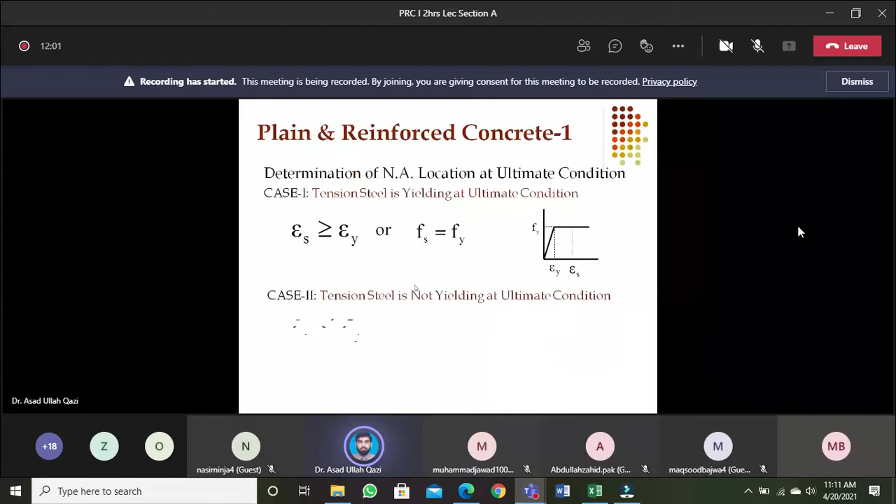Okay, this determination of neutral axis - in case we are discussing the flexural design of beams, analysis and design of beams, location of the neutral axis at ultimate condition is important to be fixed, because without this we cannot solve the analysis or design problem.

So location of neutral axis at ultimate condition. Ultimate condition means that concrete strain, when concrete strain will approach ultimate strain in the top fiber, and ultimate strain, we mentioned that as per ACI code this value is 0.003.

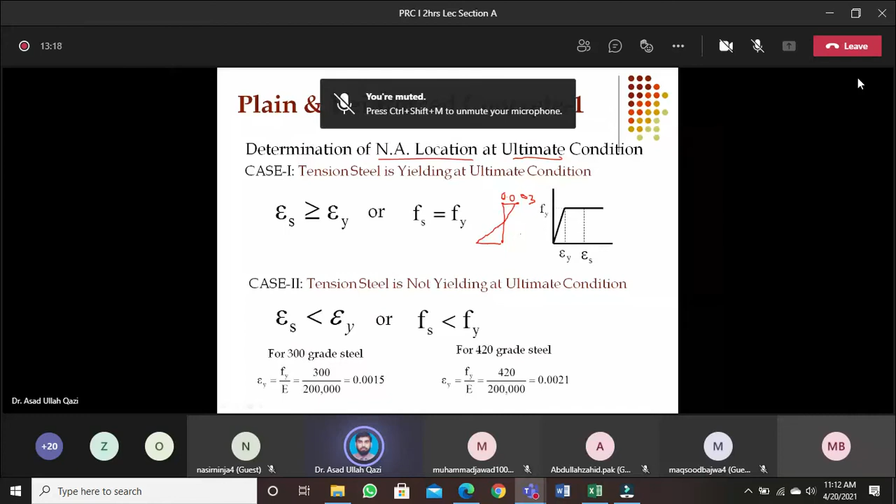So corresponding to this, what is the steel strain, and the steel location with reference to the top edge of the beam, which is the maximum strained or stressed compression fiber - its distance is marked as D, effective depth. And at this instant, when concrete approaches its ultimate strain, where is the neutral axis and its depth C, is important. And the distance from neutral axis to the steel will be then D minus C.

So this is the ultimate strain diagram corresponding to failure of concrete, because we declare the crushing strain of concrete will be 0.003, and this is the limit, and further strain in concrete we can't afford - this will be the last stage in terms of section ultimate strength.

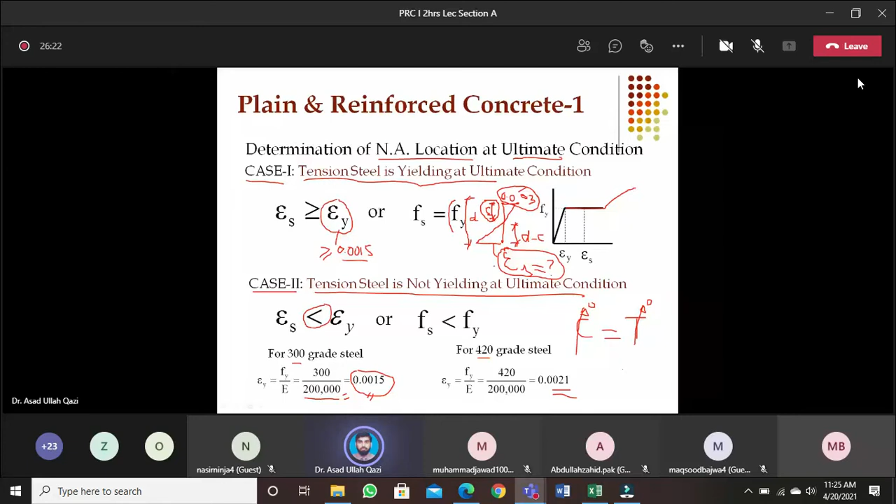Now we want to discuss case 1, its equilibrium equation, and how to get the neutral axis depth. Because as I said earlier, in the strain diagram, we know the strain diagram is linear and we know the limiting strain of concrete, that is 0.003, which ACI recommended as the ultimate strain, conservatively selected.

But at this stage, what is the neutral axis depth? And corresponding to that, what is the steel strain? These are two important questions which are to be answered.

So in order to derive the equation of equilibrium for case 1, we know the simple equilibrium equation for longitudinal equilibrium on a cross section: T must be equal to C.

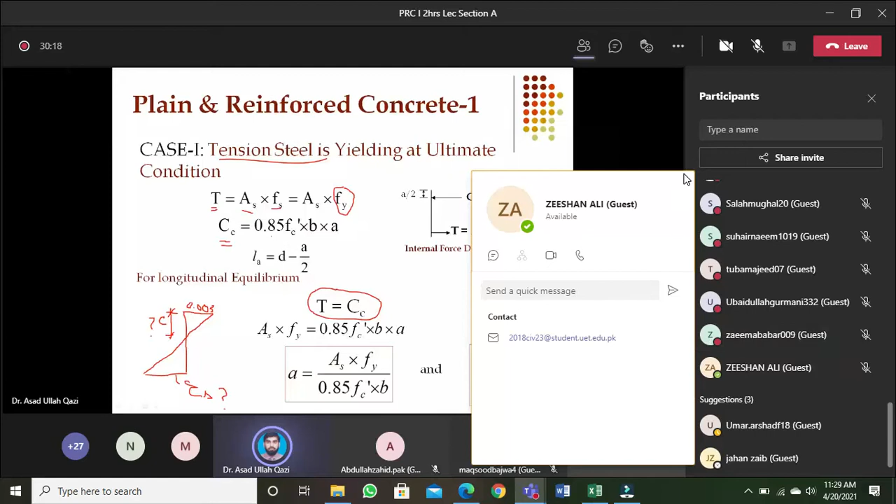As per USD, the maximum stress in steel in our equilibrium equations will be Fy. And in terms of concrete, CC: since last lecture we discussed Whitney's uniform stress block, 0.85 f'c if multiplied with the area over which these uniform stresses are present, will give us the concrete force Cc, which balances the equilibrium with the steel.

The force Cc will act at a depth a/2 from top, and the location of T is known to us because from top it will be at a distance d, the effective depth. So the distance between these two forces can be calculated very easily, and that will be d minus a/2, the internal lever arm.

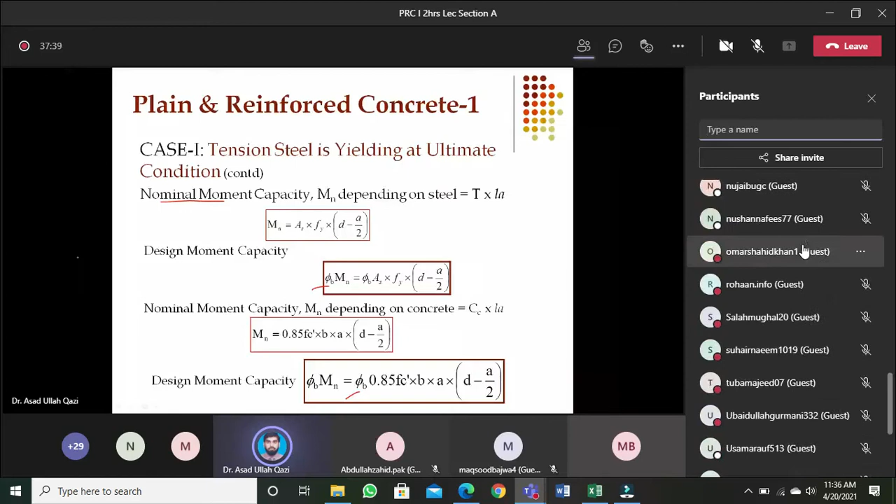In case of flexure, this phi value will be 0.9 if and only if epsilon s is greater than or at least equal to 0.005. We will discuss this strain threshold in detail—you may be surprised that I'm not using strain equal to epsilon y here. I'm giving a higher magnitude of strain in order to utilize phi equal to 0.9.

So on the strain diagram of steel, it means if I'm having grade 300 steel and 0.0015 is the yield strain of steel. So if my epsilon s is equal to epsilon y, I will not be allowed to use phi 0.9. I will be allowed to use phi 0.65.

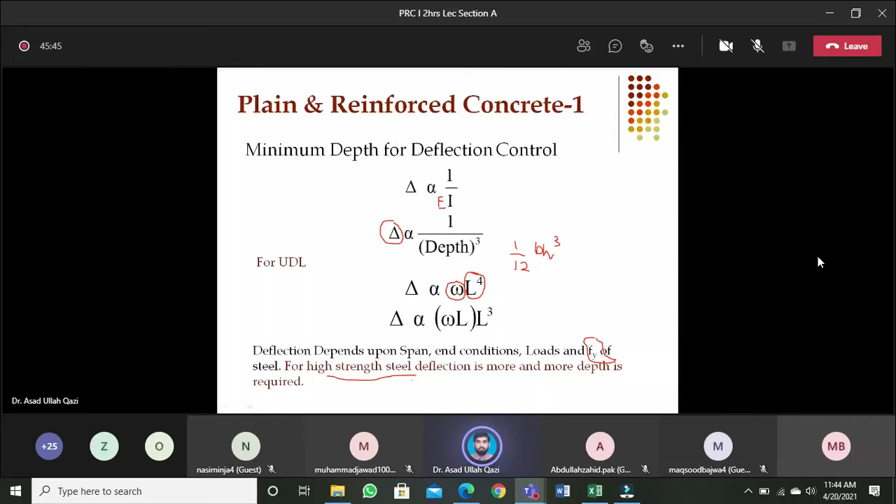So I can refer to table 9.3.1.1 of ACI 318-2019, where for different steel grades 300, 420, 520, and based on different end conditions, simply supported, one end continuous, both end continuous, cantilever, H is proposed

to control the deflections. So to fulfill the serviceability requirements, deflection within limits and less crack widths are the serviceability checks. So to keep deflection within limits, ACI will suggest you to select H for a simply supported beam based on L by 20, span by 20. But if one end is continuous, then this 20 can be increased to 23. If both ends continuous, then the denominator will increase to 26.

And in this way, for cantilevers, you will find that the demand is quite big because the tip of the cantilever will sag and deflection will be more. So more H is required if you compare different end conditions.

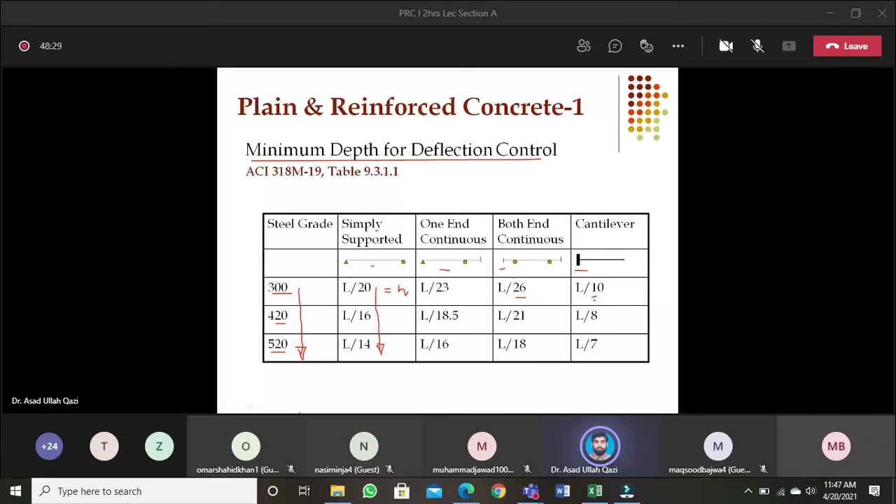So all this information we are going to utilize when I will design the beam cross section.

But at the moment, I am more interested in performing a capacity analysis because what we have talked about, case 1 and case 2, I just want to apply it on a beam problem which I have assigned to section B, and I was expecting that your section will also work on the same problem, but sadly you are not interested in watching the video or doing the assigned work.

Now let me first propose one statement that there is a beam with known cross section. I am proposing that B is 300 millimeter, a 1 foot wide beam, and its gross depth is 450 millimeter. So it means 18-inch deep beam, 1 foot by 18 inch.

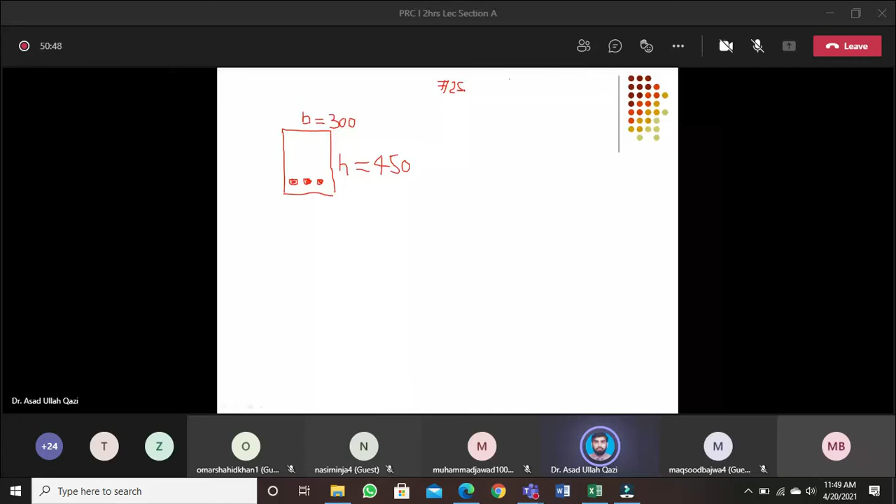So in US customary, there are different designations. We will share with you some design aids and tables. In different textbooks, you can find these design aids at the end of books. In ACI code, you can get the different bars and their designations along with the nominal dia and areas and weight per unit length. Number 25 has the nominal dia 25 millimeter dia, and it is deformed bar, and nominal area 510 millimeter square.

It will not be exactly pi by 4 db square because this bar has some deformations, lugs on the surface, so this nominal area will be calculated, and it is 510 millimeter square, the nominal area of these deformed bars, cross-sectional area. Such three bars are present in the cross-section.

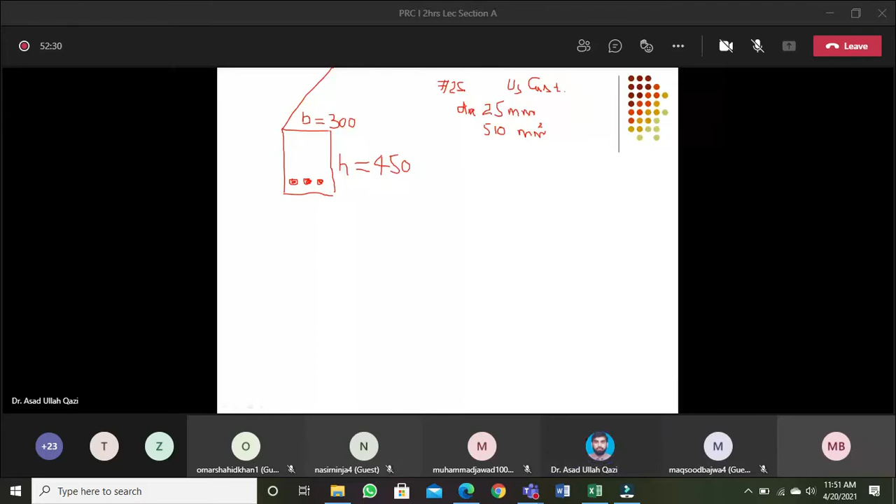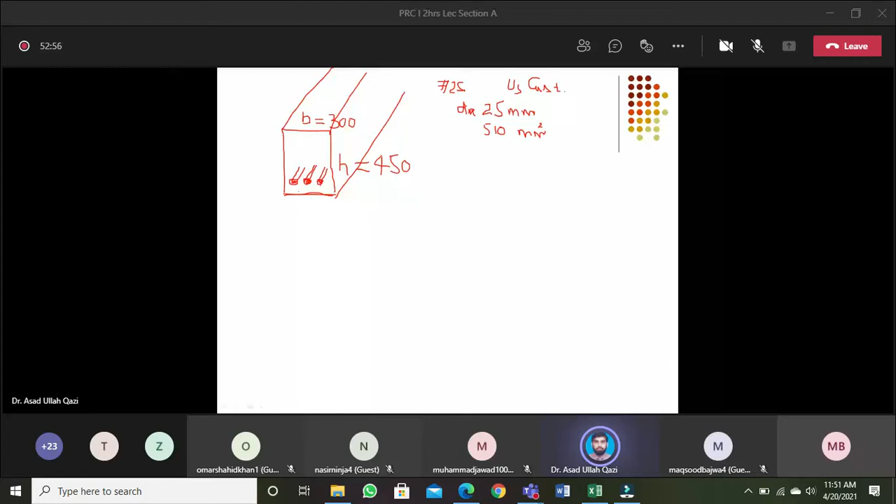And in this beam, these steel bars which are present at the bottom, these are present at a distance from bottom 75 millimeter, and 75 millimeter is the distance from center of the bar to the beam soffit. So this is I am giving you. We will discuss why this 75, why not 50 or any other dimension.

So this will be our topic in next lectures: covers and recommended ACI covers for different structural elements. So at the moment I am proposing that from base bottom to the center of the layer, cover is 75 millimeter. Cover to the center from base.

So it means effective depth of this beam will be the distance from top compression face to the center, will then be 450 minus 75. It will come out to be 375 millimeters.

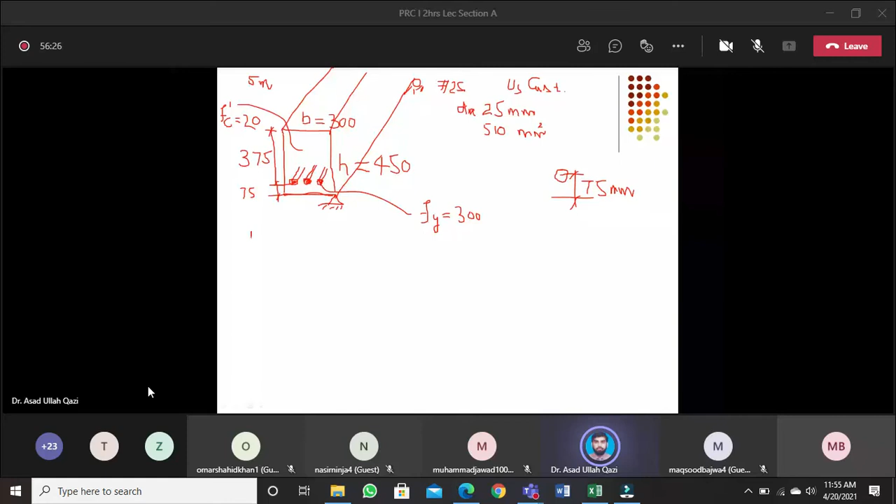And you are asked to determine the capacity of this beam. It means the question is how much this beam can provide us moment resistance. This is the question, and we call it capacity analysis because in this question cross-sectional details, material strengths, span, end conditions, dimensions are known to us except its capacity.

This is called capacity analysis. You are given with the drawing. You know each and every detail regarding the reinforcements, spans. You are asked to give us how much ultimate moment this beam can resist.

This is my question. And what I have discussed on the slide, case 1 and case 2 beam, that will be applied here. And we got capacity equations that Mu will be equal to phi into T into lever arm, or we can say that C into lever arm can give us internal moment resistance.

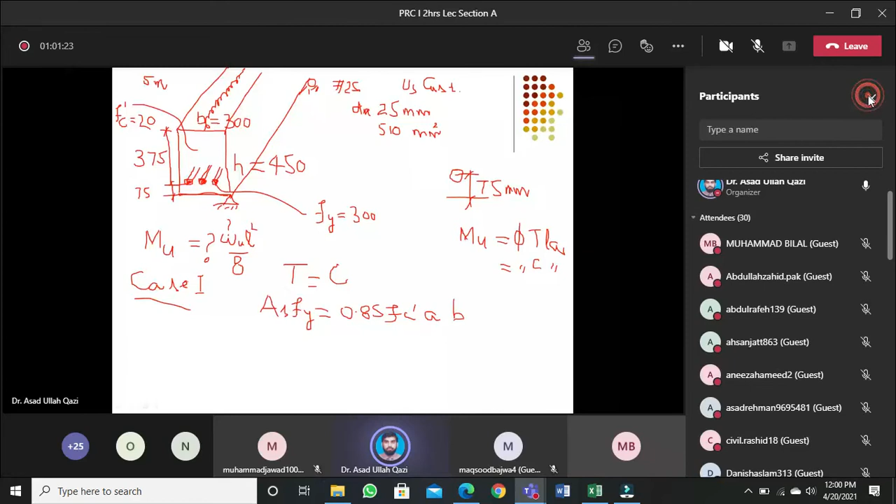And that is actually the question: how much ultimate uniformly distributed load I can apply on this beam, and against that what will be the ultimate moment resistance this beam will offer.

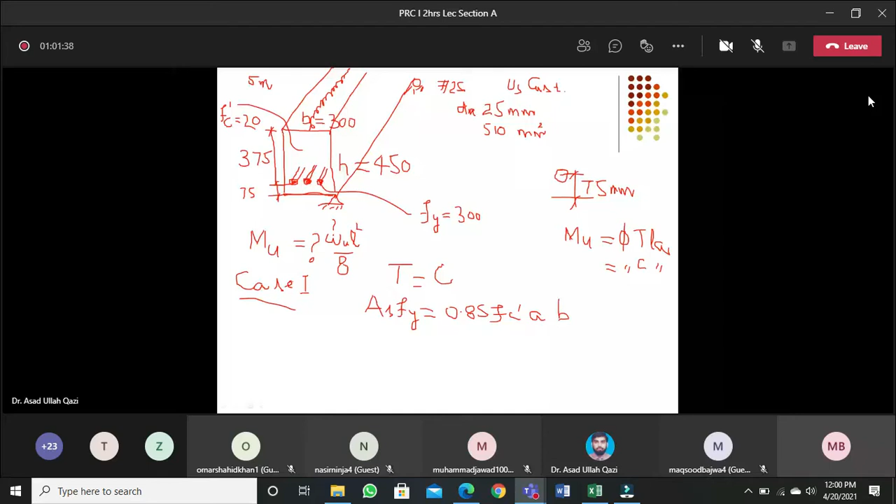And considering that it is a case 1 beam, so as I said, your first assumption will be it is a case 1 beam. So considering that this beam is simply supported and the mid-span section will be maximum stressed, at mid-span section I write the longitudinal equilibrium equation T equal to C, and keeping in mind this case 1, I am putting Fs as Fy.

And B is given, Fc prime is known, area of steel is known. All I want to know is uniform stress block depth. I will keep A on one side and arrange it like As Fy divided by 0.85 Fc prime into B.

Now since I have 3 bars, so 3 into 510, because 1 bar has the area 510, into the steel grade given was 300, divided by 0.85 Fc prime 20. I'm keeping megapascal in numerator and 20 megapascal in denominator, and B as 300.

Don't forget this picture. Actually you got this A equal to 90. And now from C you can get the actual neutral axis depth, because this A is the uniform stress block - this is the simplified approach by Whitney. And C will be A over beta 1, because we proved that the relationship between the actual neutral axis and uniform stress block depth is A equal to beta 1 C.

Since concrete grade is 20, beta 1 will be 0.85. So how much will C be? 90 divided by 0.85. Sir, it's 105.9. 105.9 millimeter.

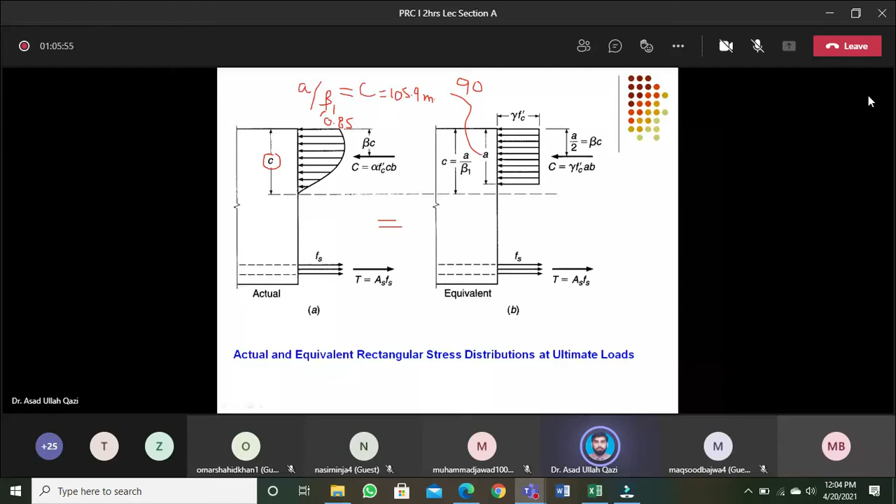Agreed? Now, if this C is 105.9, and this ultimate strain, as ACI has fixed this crushing strain as 0.003,

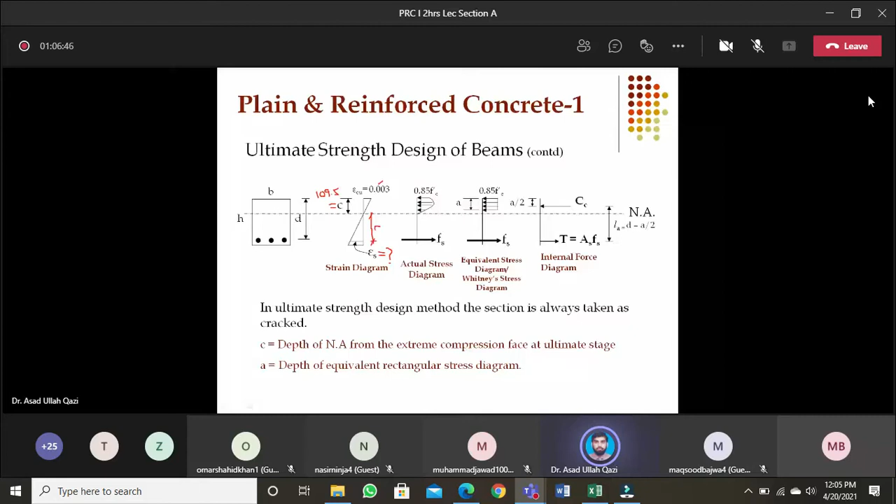what is epsilon s corresponding to this neutral axis depth C is an important check, because I have mentioned in my equilibrium equation T equal to C, and T I considered as AS into Fy. So over there I assumed that steel will be at yield, and based on this assumption I got A, from A I got C. And now drawing the strain diagram and confirming that at this neutral axis depth, whether the epsilon s as assumed is equal to or greater than epsilon y. If the answer is yes, I will be happy because my assumption is okay and it is a case 1 beam.

If not, then I have to handle it like a case 2 beam. My assumption was that once steel yields, and corresponding to that I get a neutral axis, then at that neutral axis I check based on my strain diagram whether my assumption that steel yields at this neutral axis is valid or invalid. If the assumption is invalid, it means I was wrong in expecting that at this neutral axis depth steel will yield. So I need to go back and revise my equation with AS into FS, and then I have to handle it like a case 2 beam. Let's see what we get.

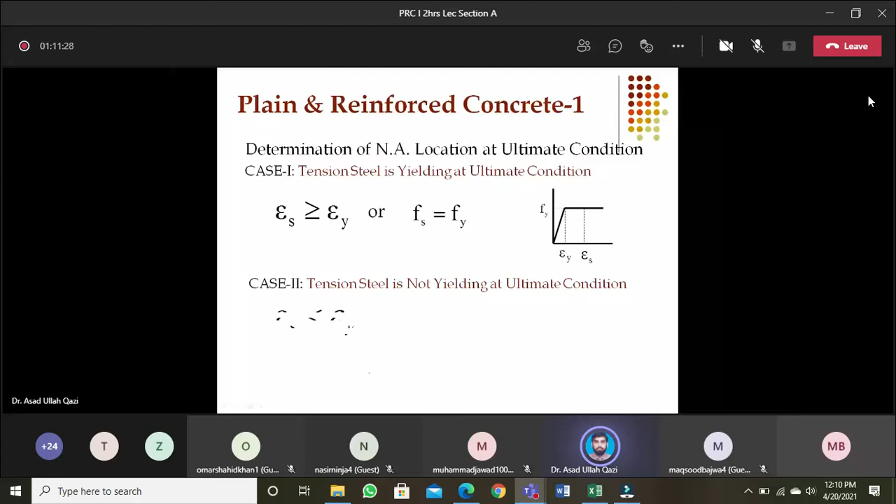We selected 3 bars of 25mm, grade was 300, divided by 0.85 into 20 grade of concrete into B, and A was 90, and from A you got C, and C was 105.9. Agreed? And from this now you got

epsilon S, and from the simple strain diagram you mentioned that 0.003 divided by 105.9 into 375 minus 105.9 - check this - so you also got 0.0076. How much again? 0.0076, good. So that is the epsilon S.

So as assumed, epsilon S is well above epsilon Y. So in terms of the steel stress strain relationship, definitely it is on the yield plateau, and it is even above 0.005, which is a very desirable strain limit.

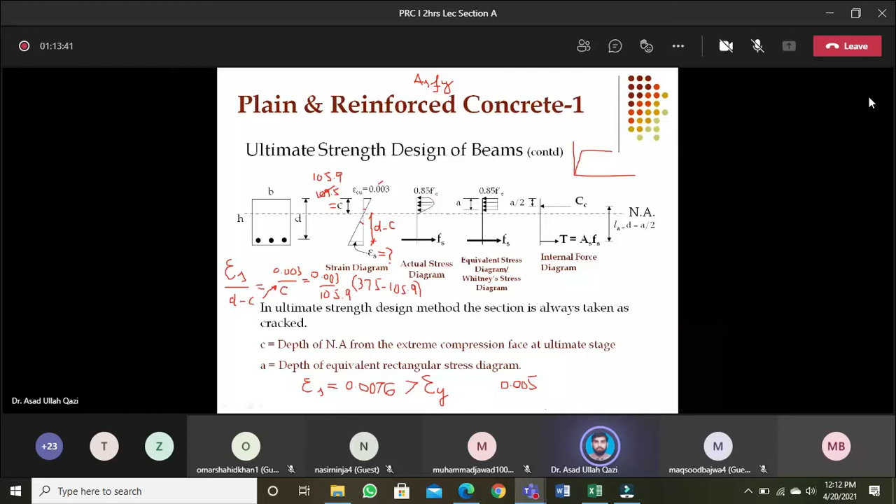We will discuss this in the next half of the lecture, but at the moment I can confidently state that since my check is okay, my epsilon S is greater than epsilon Y. So our assumption that steel will be at yield is okay.

And now it is time to determine the internal capacity either by using phi into T into lever arm, or phi into C into lever arm. Since epsilon S is even greater than 0.005, as I mentioned in my lecture, 0.005 and above means phi can be 0.9.

So I can now write the equation of moment as Mu is equal to phi, AS which is 3 into 510, into Fy, because now I have no doubt since epsilon S is greater than epsilon Y. AS into Fy into lever arm, and lever arm is D minus A by 2, and D is 375 minus A you calculated 90, by 2. So 375 minus 90 by 2 is the lever arm. Can you multiply this: 0.9, area steel 3 into 510, Fy 300.

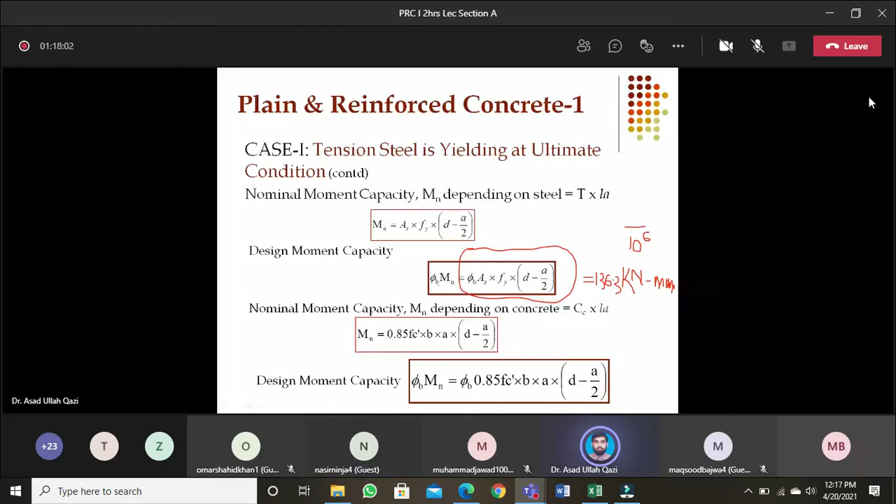So knowing this, now it is time that based on my end conditions - simply supported - and knowing the span, I can calculate the load which I can apply on this beam, because you will agree that normally the user or client will be more interested in knowing what load I can put, rather than if you tell them moment, they might not understand what that means.

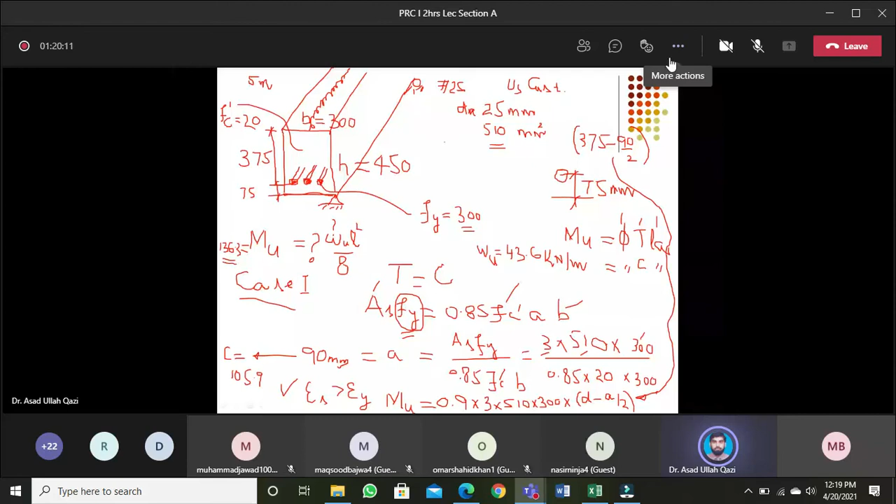This deep beam reinforced with 3 number 25 bars of grade 300 and concrete strength 20 megapascal, having a span of 5 meter, can be subjected to an ultimate load of 43.6 kN/m on the beam.

Your beam will approach its limiting strain at that ultimate load. During service life you might not put the ultimate load on the beam, but if this ultimate comes, your beam will respond with excessive yielding of steel and warning, and then eventually crushing at the top due to failure of concrete. But well before failure, there will be a lot of distress, cracking, straining at the bottom, excessive sag will appear, and then finally, once this 43.6 is approached, failure will take place.

So service load means dead plus live, and ultimate means when you put 1.2 dead plus 1.6 live - the exaggerated loads - once they are present, then against them we know what moment it can resist.

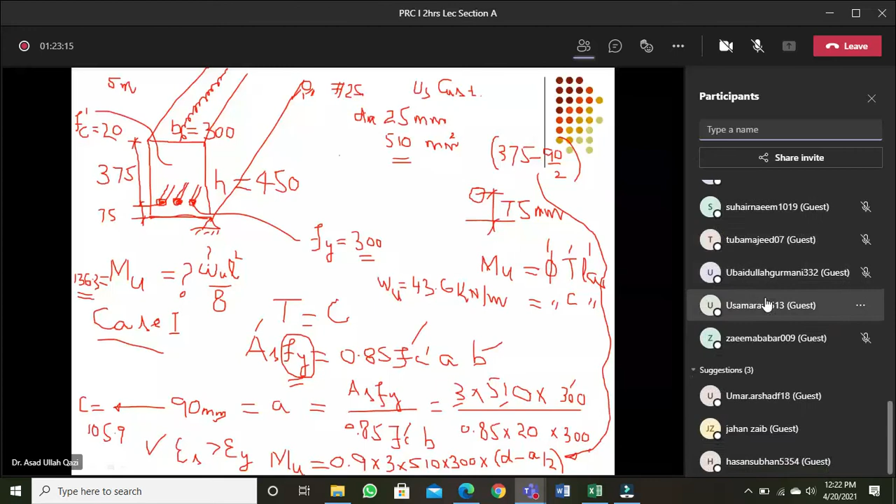then your answer will be the same from other approaches too. Let me use that. What will be C? 0.85 into FC into B, 300, into A, 90.

So this will be your CC. Then into the same d minus a by 2, which you have calculated here, into 0.9, because we have checked this assumption that our steel is yielded and there is no ambiguity in selecting phi equal to 0.9, because our epsilon s is even bigger than 0.005. So you must get the same answer even from CC into lever arm.

Yes sir, getting the same. Because don't forget that you selected T equal to C. Your equilibrium equation is both are equal. So there is absolutely no doubt that either you use T or C, you will get same answer. But I repeat, normally you will prefer T part of the equation.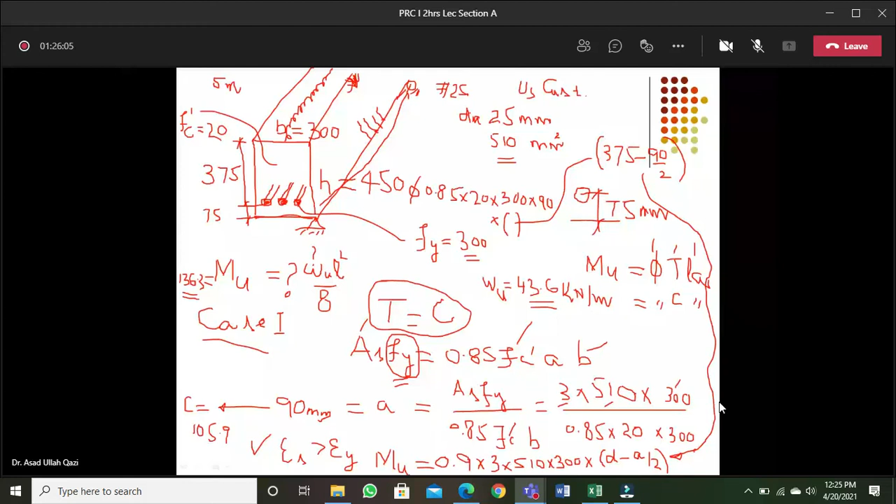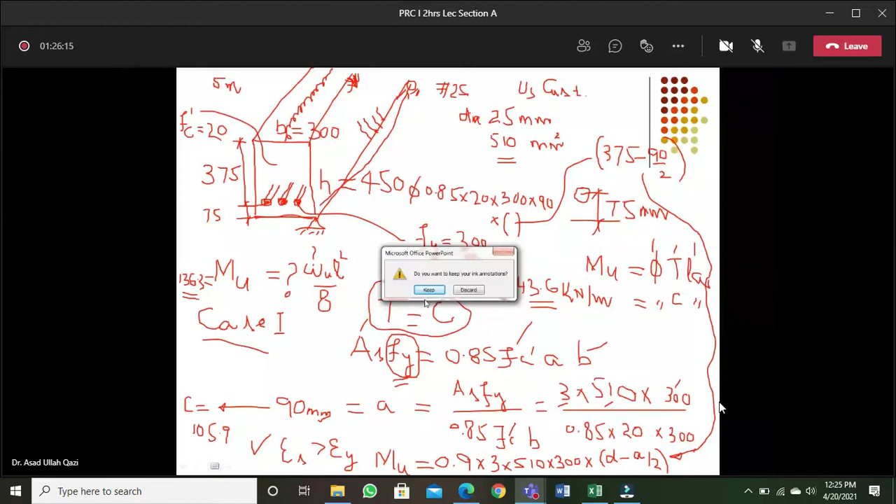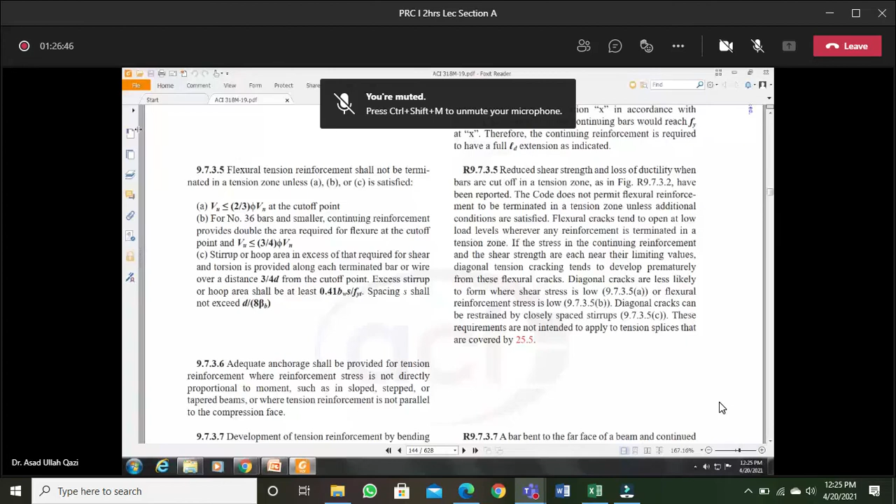Now what I want to share with you is one thing. I have already uploaded this ACI 318 document, so I just want to share with you one information. As I selected number 25 bar, and I said it is US customary, in almost all reinforced concrete textbooks and even in ACI code, my screen is visible. Are you following my screen? Yes sir. Okay good. So on this code, you will find that there is appendix A and appendix B.

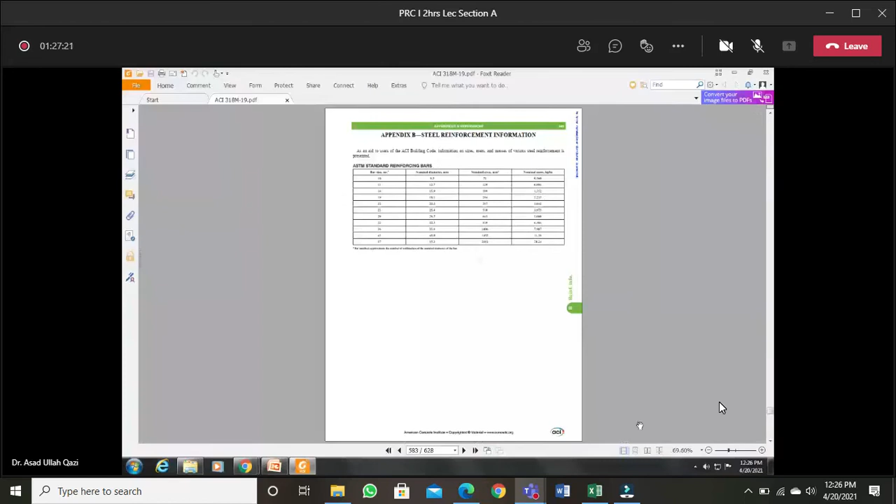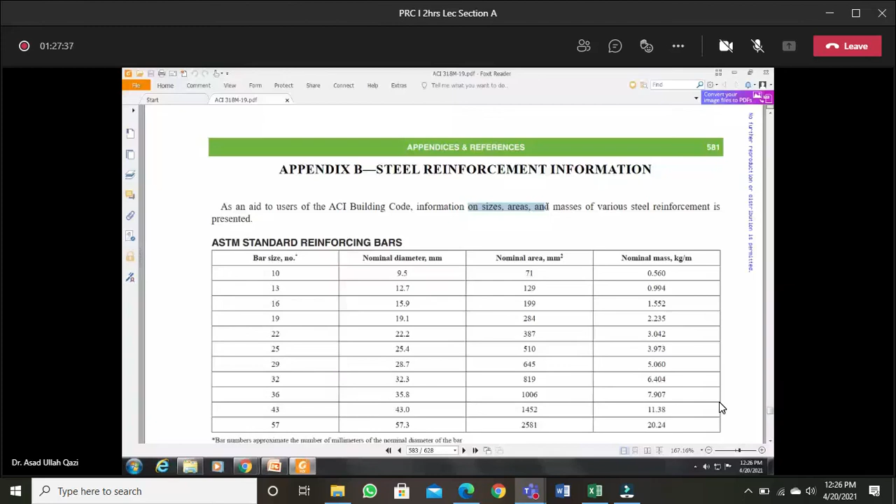In appendix B, it is mentioned steel reinforcement information. So when you select this, you will get as an aid to users of the ACI building code, information on sizes, areas, masses of various steel reinforcement. And you will find that what I selected, number 25, here the nominal dia they report exactly 25.4, and area 510 millimeter square, and nominal mass in kg per meter. In case of weight estimation, this will become very important in design.

When you want to review the capacity or you are doing a new design, you want to select out of these bar numbers different bars. Normally in Pakistan, bar number 10, and in FPS system we call it number 3 bar, and in local language we call it teen sutar. It is very commonly used among laborers, typical local language words, teen sutar.

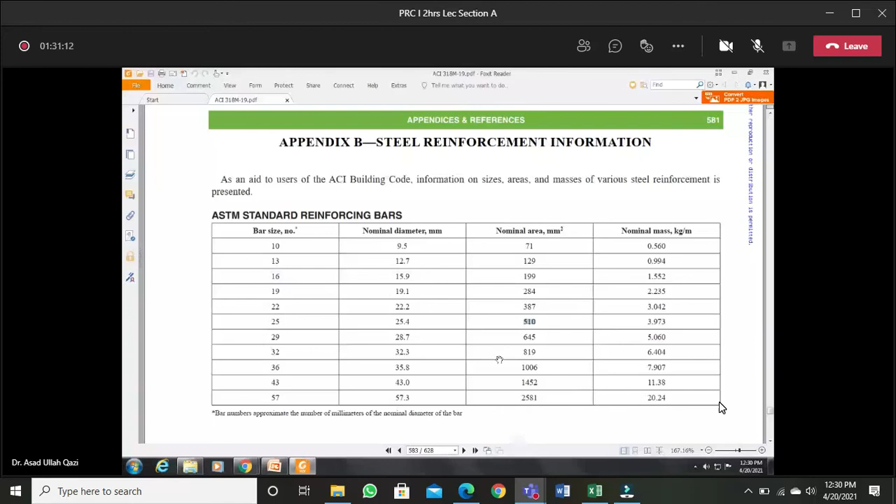Now one more, you can say, information. In ACI code, chapter 9 describes beams, and...

When you search ACI code, in provision 9.7.1.1, in chapter 9, in provision 9.7.1.1 — by the way, I have uploaded this document on your MS Team. You can download it, and it's very useful to read this document because in the commentary there is a lot of useful information, background research and experiments and technical discussion.

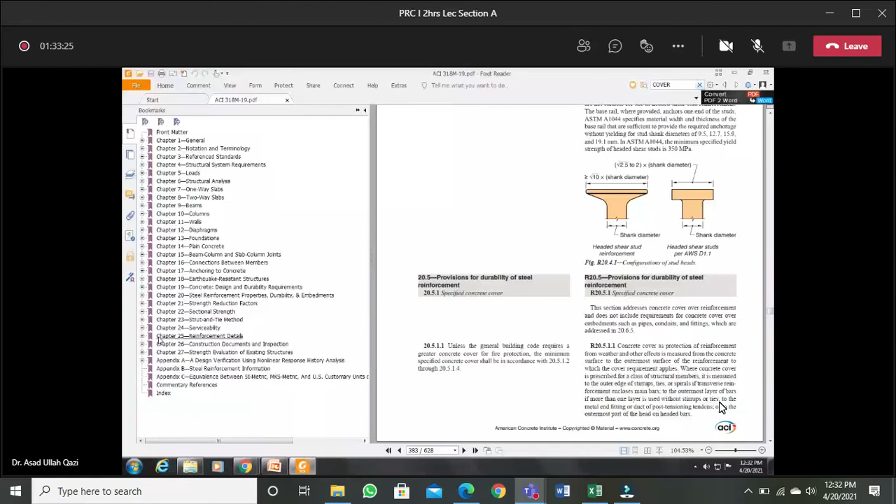Cover arrangement shall be as specified. Now click on this 20.5.1. It will take me to chapter 20, and chapter 20, 25 is reinforcement details. So I consulted chapter 9, and the provision of concrete cover has taken me to chapter 20. Now in chapter 20, it was stated... 20.5.1 specified concrete cover, provisions for durability of steel reinforcement, and chapter 20 describes in provision 20.5.1 specified concrete cover.

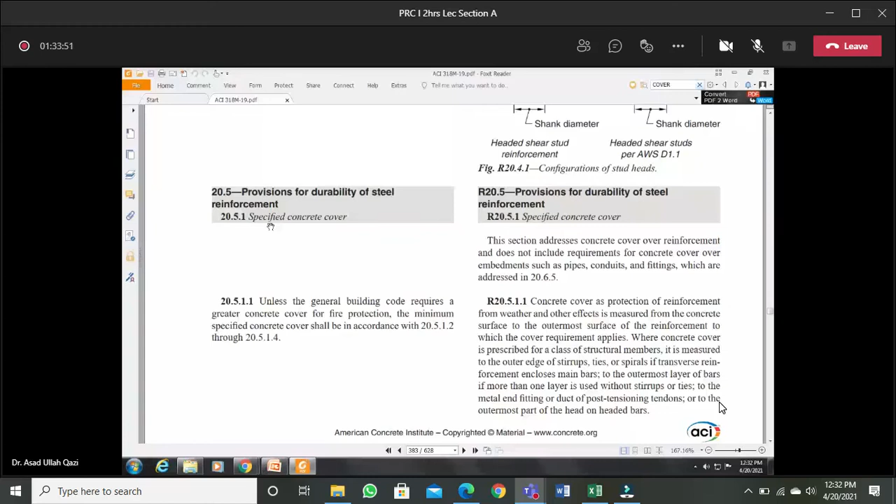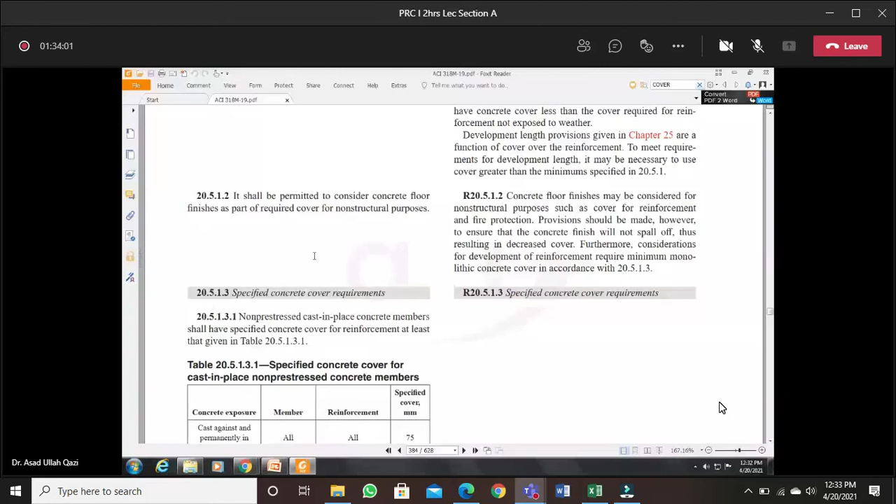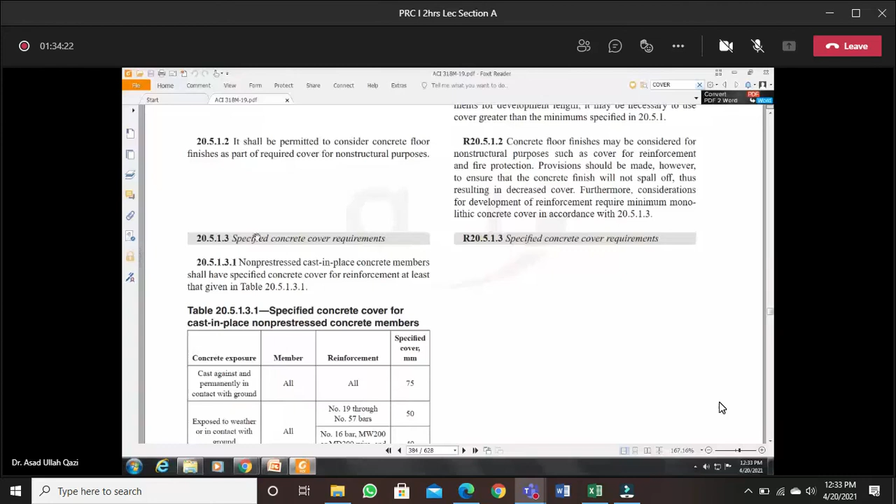So when I go through this chapter, I get a very useful table. There are different provisions, you can read them, but I want to take you to that table directly, which will be important for you as a designer. You need to know results: specified concrete cover for cast in place non-pre-stressed concrete members.

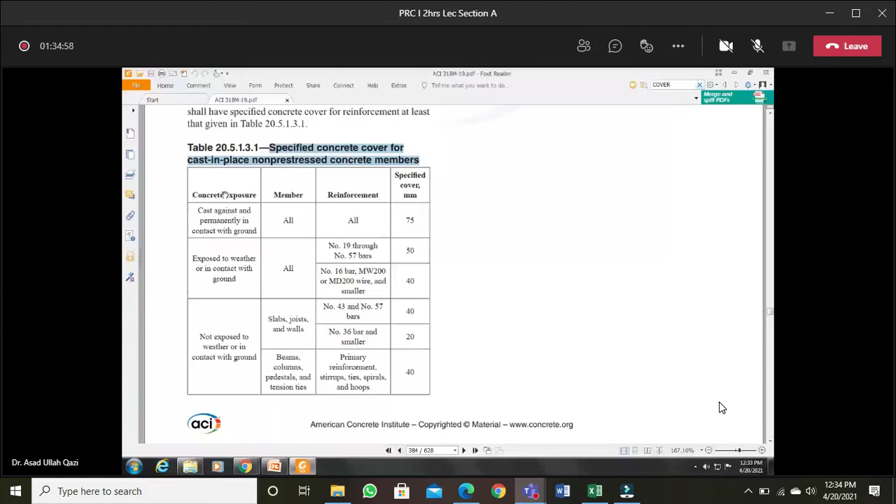So this information will be applicable for all non-pre-stressed reinforced concrete members. Now look at the concrete exposure, member, reinforcement and specified cover. And it is actually concrete cover, it is clear cover. It is not the cover to the center of the bar.

Let me just draw one picture to give you this understanding. You can see such pictures in different textbooks. When I have a cross section... bar, and this bar will be enveloped by a ring, we call it shear stirrup or ring. And what we are talking about, that cover is actually the clear cover, even below the ring, clear concrete cover. This recommendation of ACI, what we are discussing, is actually the clear cover.

Then in order to get to the center of the bar, I have to add the tie dia plus half of the bar diameter to get the cover from center. And in your problem, I proposed to you, now you will get the idea why I selected 75.

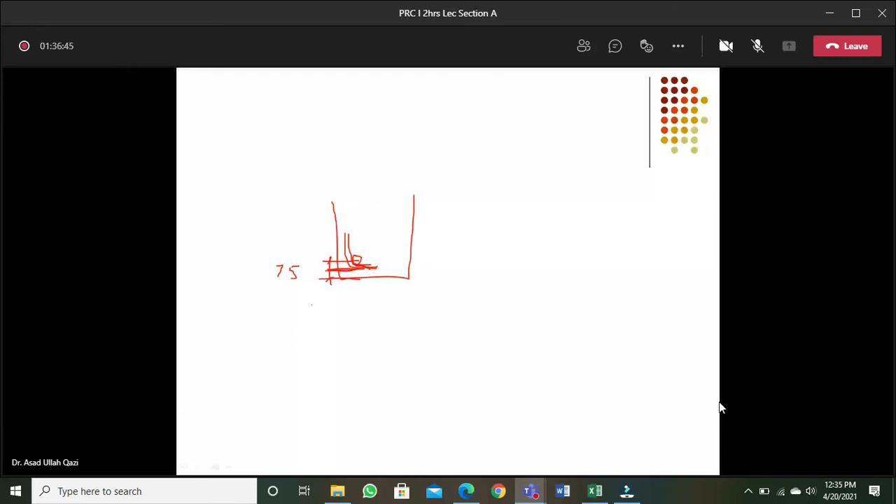Again, take the ACI code table. Let me read this: not exposed to weather or in contact with ground. So a very conducive environment, not severe weathering action, indoor, and not even in contact with the ground, so sulfate attacks from soil are not possible. And remember, it is stated for beams, columns, pedestals, and tension ties. So it means interior beams, interior columns, primary reinforcement, stirrups, ties, spirals, and hoops.

So it means it is the clear cover to the primary reinforcement, clear concrete cover. And don't forget, ACI recommends in beams and columns which are not exposed to weather, severe weathering action, indoor conditions, and nor they are in contact with the ground, the cover requirement is 40 millimeter clear cover. And in FPS system, we use 1.5 inch against this 40 millimeter.

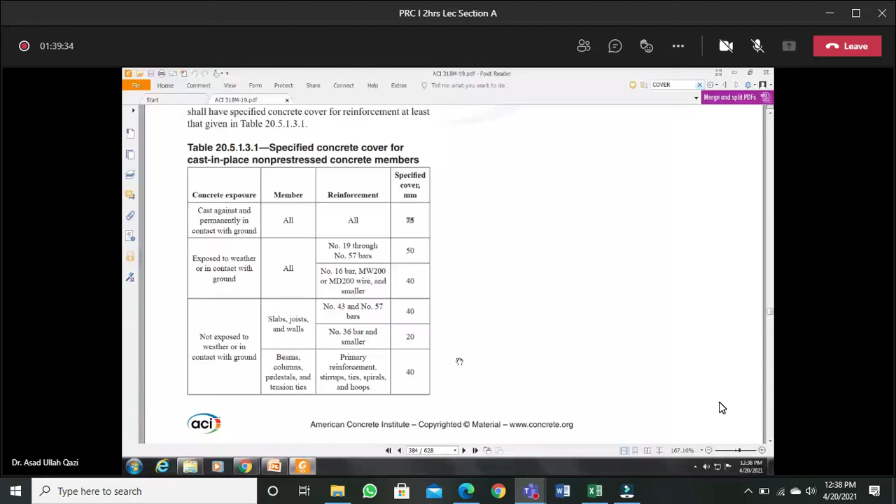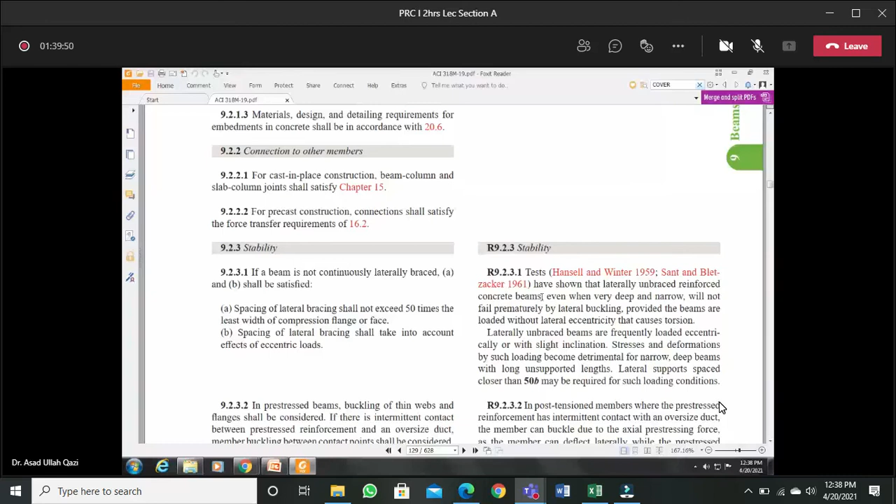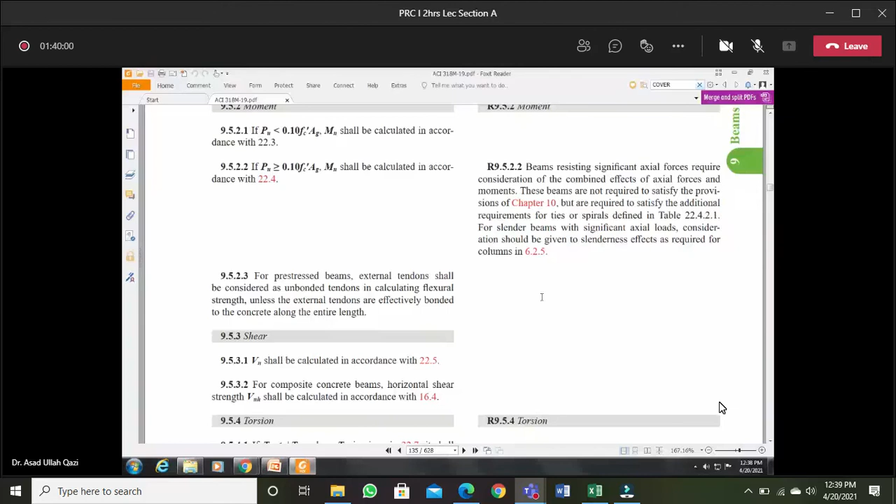It will become 50. Then furthermore, if I move to the center of this bar, and if this bar is number 25, so half of this will be 12.5. So it means 40 plus 10 plus 12.5. So mechanically, the answer from soffit to the center will then be 62.5 millimeters.

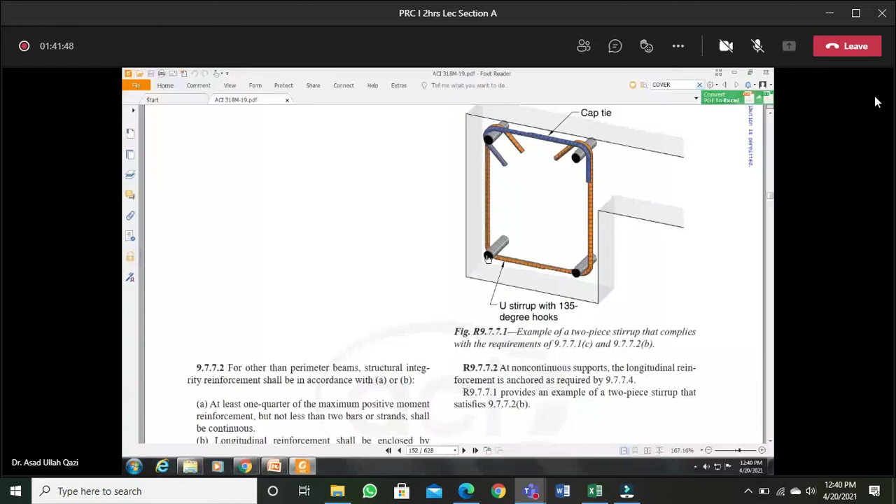Strictly speaking, if I have a sketch with me, I know the ties. If tie is suppose number 13 dia, so it means 40 plus 13, 53. 53 plus half of number, if I am selecting the longitudinal bar number 25, so half of it will be 12.5. So 53 plus 12.5, it will be 65.5, and then 66. So in this way, I need to sum up all the dimensions to get to the center of the steel, to get the cover.

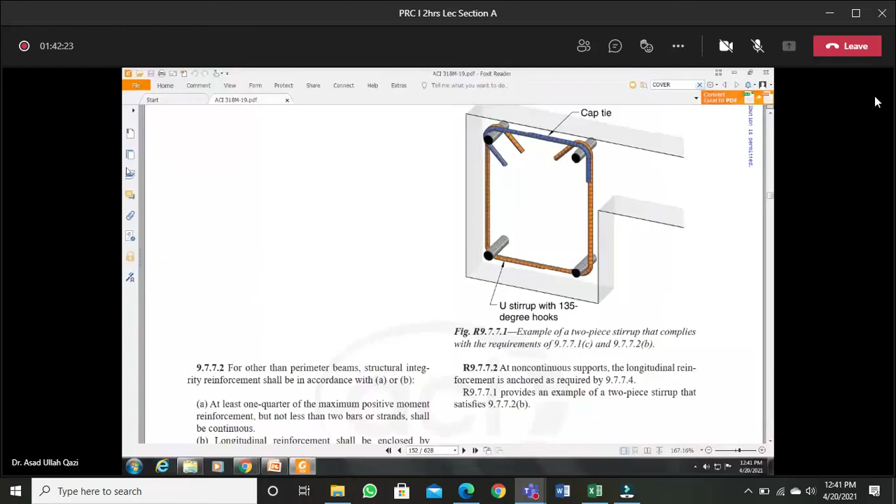When the word clear cover will be used, then it means we are talking about the clear concrete. When the word cover will be used, it means cover from the bottom to the center of the steel. So don't forget that.

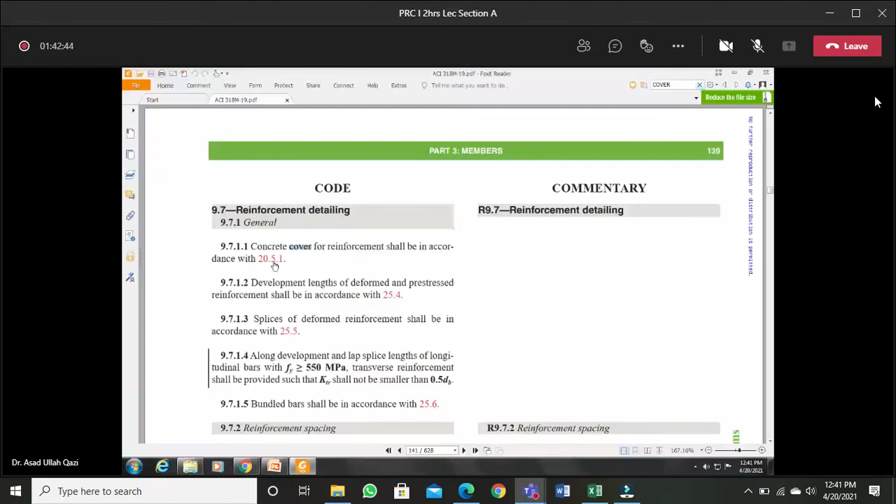Here when I searched the cover and I got this provision, concrete cover of reinforcement shall be in accordance with 20.5.1, and I got to this, it is specified concrete cover.

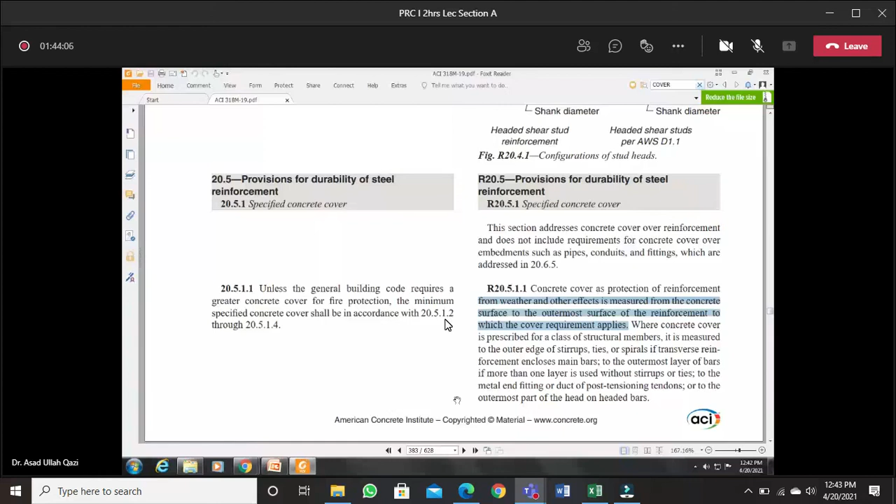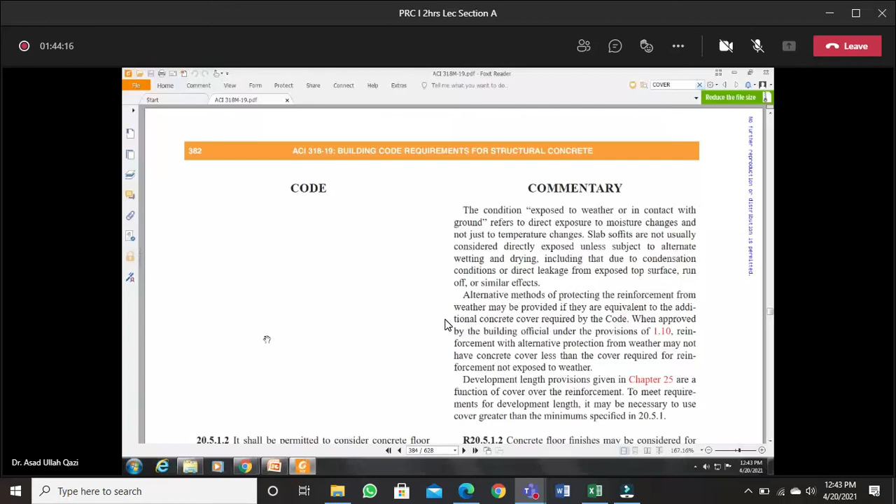When the word concrete cover is used in the code, they are using concrete cover. In some textbooks, they further put the word clear, so it means it is the clear cover. And here in the table, they are using the table title word specified concrete cover. So if it originally said clear cover, there would be more clear information that it means all concrete which is enveloping the reinforcements.

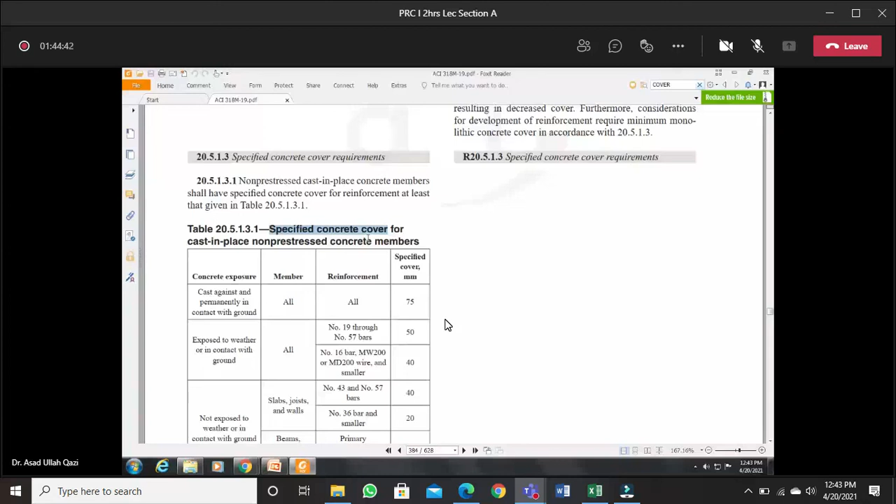So this is one point which is important. Let me take you back to the folder of PRC1.

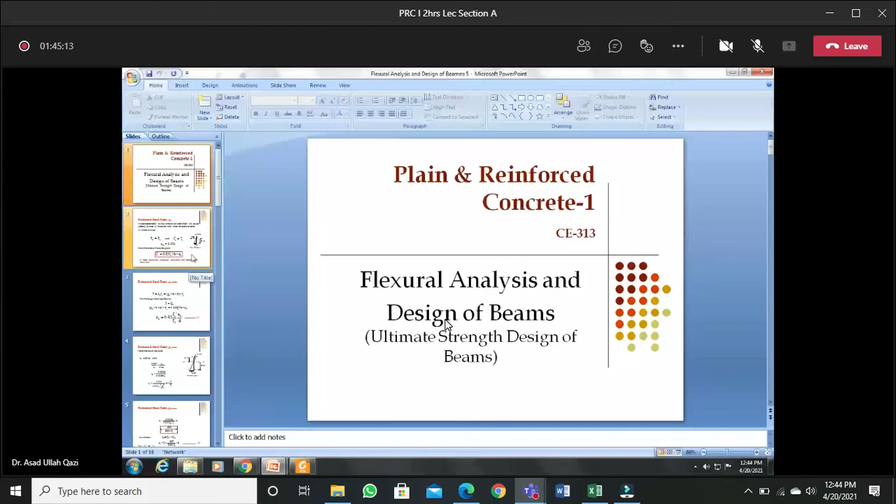So we finished one very simple problem of capacity analysis, and we discussed case 1 and case 2, and furthermore I mentioned that when I have a strain diagram, a linear strain diagram, I can determine the status of the strain in the steel bars if I know the neutral axis depth.

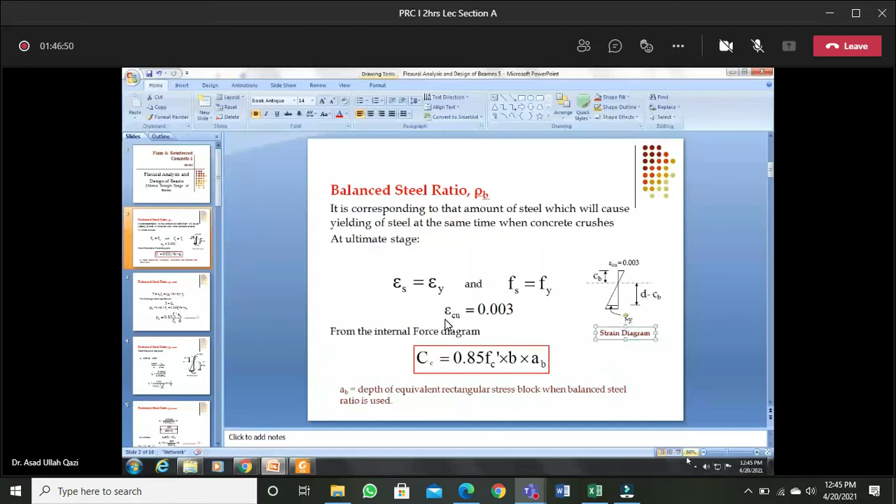Now, in this presentation, I want to discuss a very important ratio, a unitless ratio, and it is named as the balanced steel ratio, and the Greek letter rho with subscript B is used to define this ratio.

This balanced ratio's definition is also very important, and its determination will help us decide whether our section is case 1 or case 2, whether it is tension controlled or it is over reinforced. So it is a dividing line between desirable and undesirable behavior. For this balanced steel ratio, I can derive one very simple equation to determine it.

But before talking about this ratio on this slide, I just want to draw your attention that a few minutes ago we solved one problem of capacity analysis. And if you recall, what we determined was the capacity of that cross section, and the cross section had 3 bars, number 25.

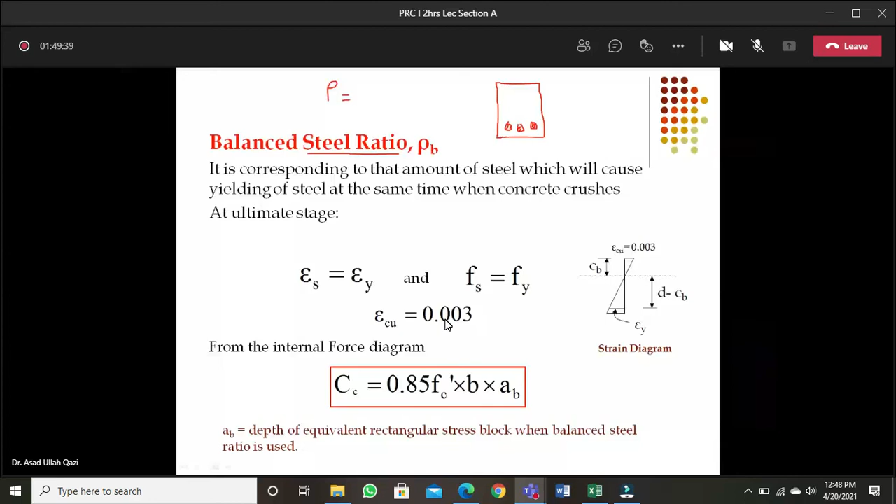The reinforcement ratio, denoted by the Greek letter rho, is the ratio between the area of steel in the cross section divided by the effective area of the cross section. Effective area means, in flexure, the area which will be involved is the width of the cross section multiplied by the effective depth.

So keep in mind that when you are talking about the reinforcement ratio in flexural members, you will not use gross depth in the denominator, but effective depth, because the cover concrete is not utilized in moment resistance. So we call effective area B into effective depth, and in the numerator we have how much area of steel is present in this effective area.

The problem which we solved just a few minutes ago, if I ask you can we calculate the reinforcement ratio of that cross section? Yes, we can, it's very easy. We had 3 bars, each of area 510, number 25, divided by the cross section which had width 300 by effective depth 375. So can you give me the reinforcement ratio in that cross section? Can you calculate, please?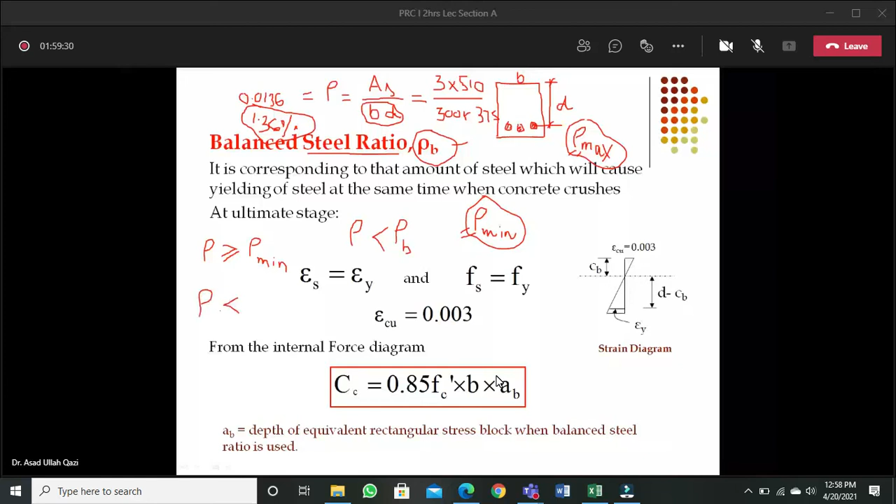And furthermore, there is another very important requirement as per your ultimate strength design, to design a tension controlled cross section that in design keep your rho at maximum equal to rho max. So if all these three conditions hold, that your rho is less than rho balanced, but it is greater than rho minimum, and ideally it is less than or at maximum equal to rho max, you are actually on target.

Your section is tension controlled, case 1, and not only will it give you warning before failure, but also it will not fracture all of a sudden because your rho is greater than rho minimum. If your rho comes out to be less than rho minimum, the chances of sudden failure after cracking of concrete in tension are there, or the crack width will be very wide, and it is undesirable to keep the steel so less that it goes below rho minimum in the cross section.

So just to give you the importance regarding rho, I spent this much time, but actually our target at the moment is to define the balanced steel ratio rho B, and then to develop a small equation which we use to determine this rho balanced.

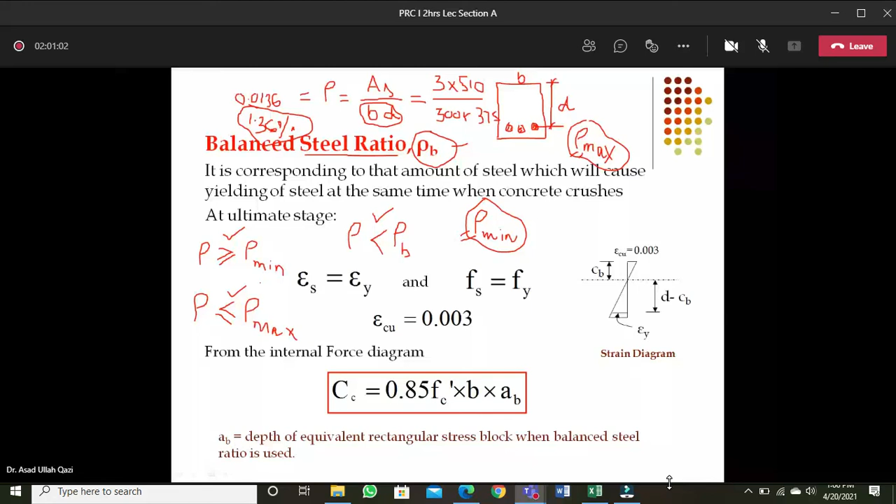In today's lecture, just a few final minutes are left. I want to define this balanced steel ratio with this strain diagram. Don't forget this diagram because it will always help you to define the balance.

This steel ratio or reinforcement cross section will result into crushing in the concrete and yielding in the steel at the same state. The concrete will approach its strain at the same instant the steel approaches its yield limit. That's why it is named balanced failure.

So once concrete approaches this point, steel will approach this point. The subscript B used with neutral axis depth signifies that it is not an ordinary neutral axis depth, it is the balanced corresponding reinforcement, shown as B.

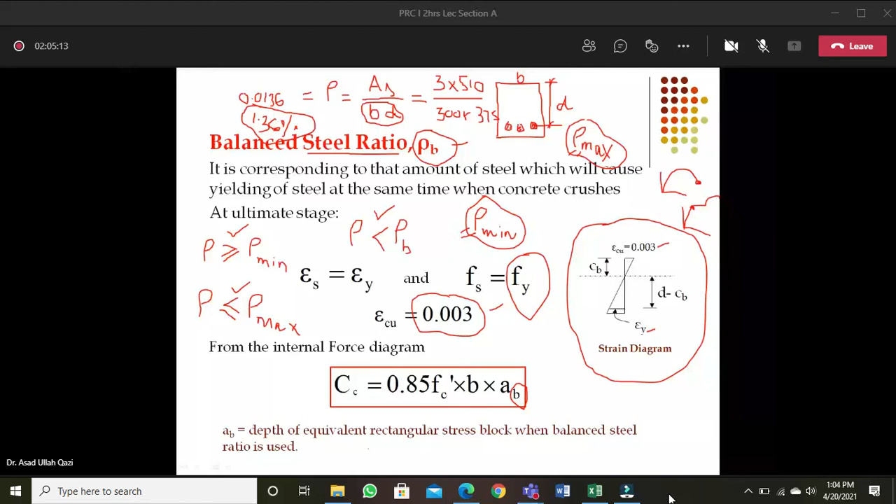So if you have time, we can continue for a few more minutes, but your CR said that you have to offer prayer.

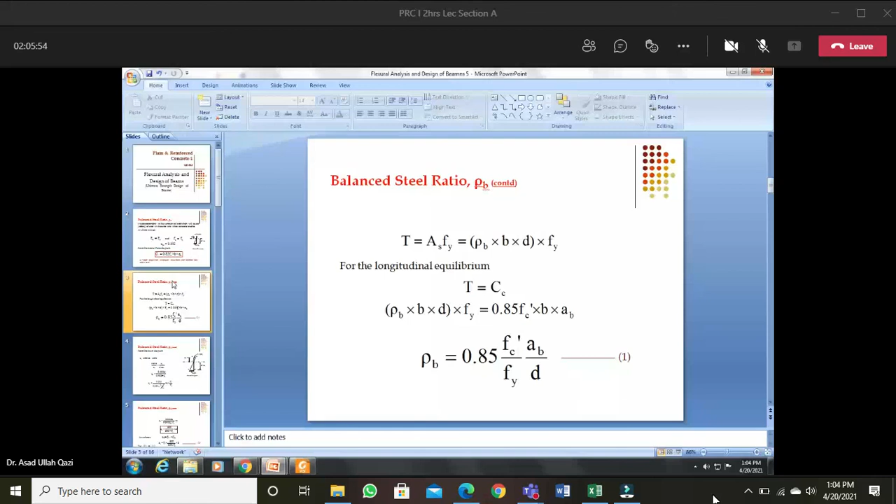Excuse me, sir. Yes, please. You were a little late from the class, so I don't know, did you take the attendance or not? I just downloaded your attendance, and the recording is also present in the files folder, so you can watch the video. And I recommend section A to please watch the video seriously and follow the class material and lectures, otherwise you will be left behind.

Inshallah, inshallah. Already we are on online ODL, or online distance learning program. Already we have less direct interaction, and I'm using PowerPoint to describe the problems. So if you will not watch the videos seriously, then it will be very difficult to get the contents 100%.